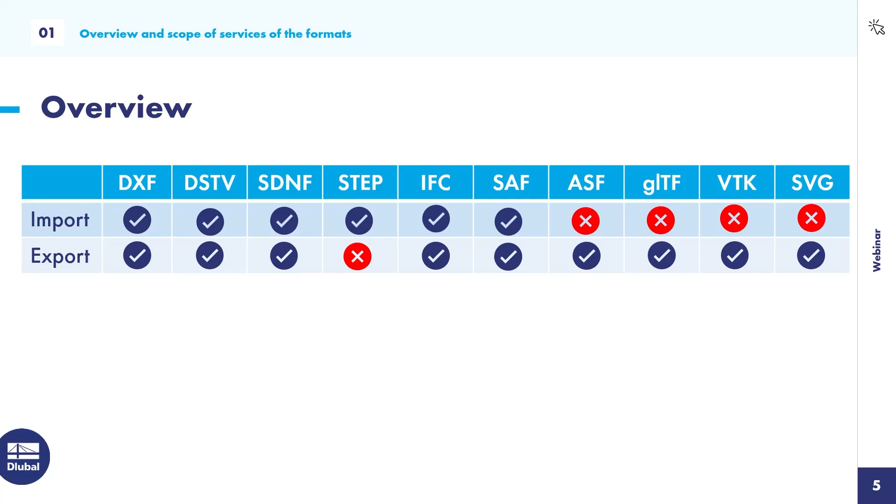We will start with the DXF interface and some brief overview about the import and export possibilities. Concerning the import, we mainly support the import of nodes and lines. You can, however, also import members from the DXF format. To do so, you have to mention the cross-section and optionally the material name inside the layer. And then we can read this information and automatically create members. We can also import surfaces from AutoCAD, however, only if the object is a 3D face element.

Then concerning the export capabilities, here we mainly export nodes and lines. So members with the graphical rendering in RFEM will be exported as a simple line, not as a 3D rendered object. We can also export dimension lines, and concerning the results, for example, the FE mesh or the deformed structure, as you can see here on this graphic.

One more information regarding the import. There are 2 options. We can import the DXF information directly, so you get the lines and the nodes and so on, or you import a DXF as a background layer. That is, of course, also possible. Now I would like to give you a quick demonstration of the import and export. I'm starting with the import.

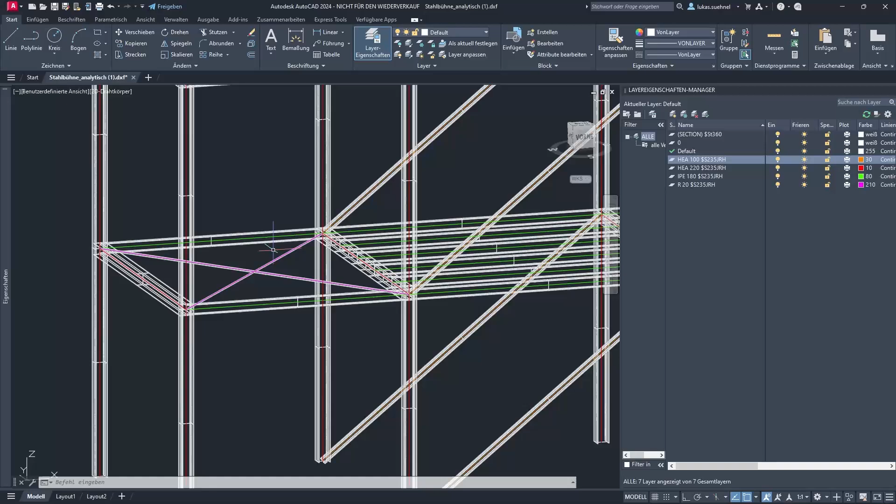And I also assigned the cross-section and material name to these layers, as you can see here on the right-hand side. The HEA 100, then the $ sign that splits the cross-section and the material name, and then the material description or name. So if you have that, you can import this into RFEM 6. I already saved it as a DXF file, so there's nothing to that.

And then I can go into RFEM 6, go to File, Import, and use here DXF2. I can select the DXF file, and then I will get a little dialog that allows me to define additional settings. First of all, I want to rotate the structure because otherwise it would be upside down due to the global coordinate system. I want to generate the members based on the layer names.

And I also want to import only selected layers. So in that dialog, I already see which layers I have inside that DXF file, and I'm not interested in the default or the specific section layer. I only want to import the center lines, basically.

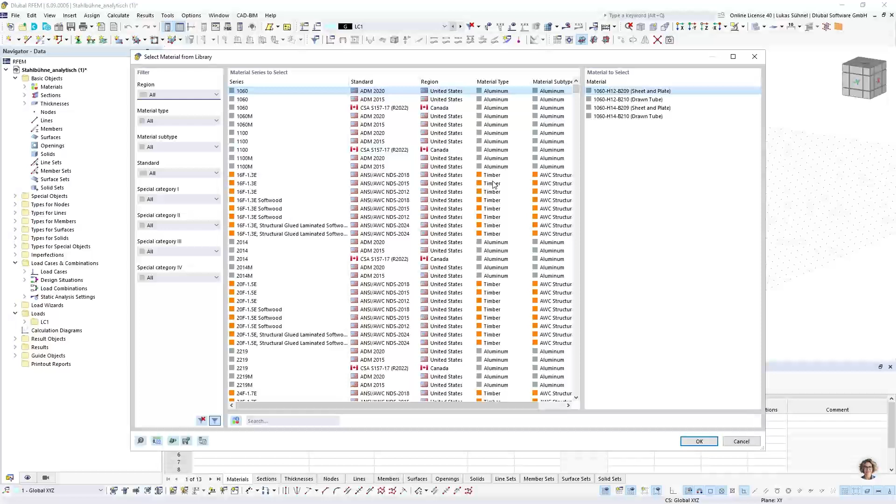So let's do that. We'll take a short moment. The cross-section or the conversion tables will open. So in case your layer names do not match the cross-section or material name inside RFEM, you can define them in this conversion table, assign the related Dlubal material or section, and then you can import it. It should be filled correctly on my side here already, so I don't have to do it.

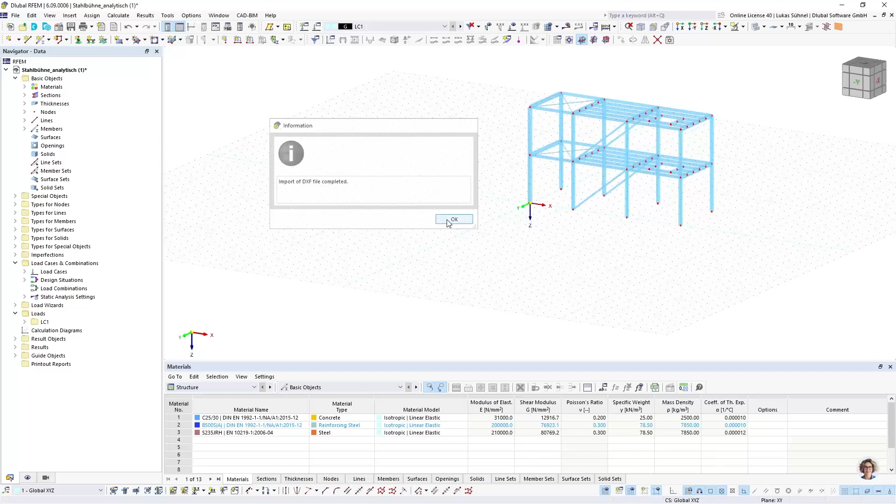I just click OK. And now RFEM will lock itself. You can see it on the bottom. Everything is grayed out. I can't do anything, and this is on purpose. We are using our API to read this data, and while the API is working, you're not allowed to do anything in RFEM. So we are locking the screen. The import is finished, and you can see the same structure here in RFEM now.

We can briefly check the imported data, for example, by using a specific display function. I can use colors of rendered objects by object property, member section, for example. And then I can quickly double check if I have the right sections in my file, so basically if the conversion was set up correctly.

Or you can run additional checks. For example, under Tools, you have a model check for identical nodes. It shows up quite often that in DXF files there are nodes very close to each other, or multiple lines on the same location, and we have these model checks that can help you find these situations. For example, you can set the tolerance for identical nodes to 1 centimeter, and then you can check if in a radius of 1 centimeter there's more than one node, and then you would see those nodes here. It's not the case here, so it should be fine.

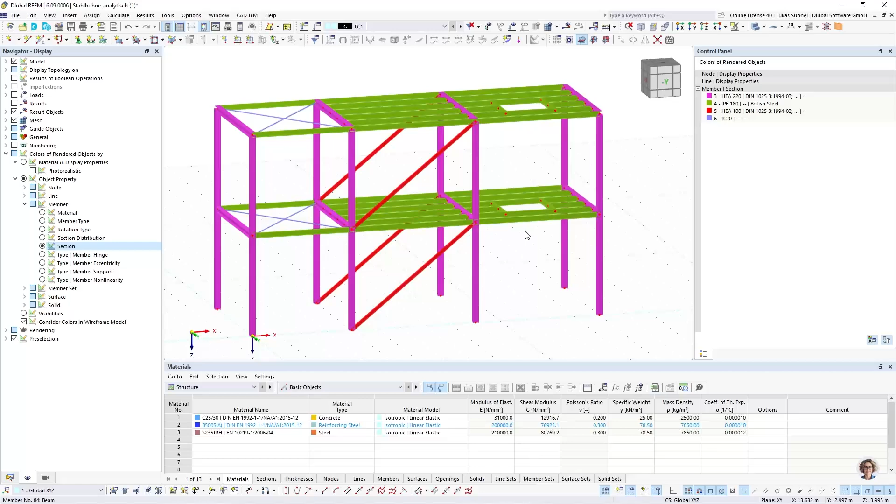And with this data, with these native objects, members, lines, and nodes, you can continue with the loading, the supporting, and adjusting the structural model in general, of course. That is the DXF import. And now I also want to show you the export. So let's open another file. I have them prepared, of course.

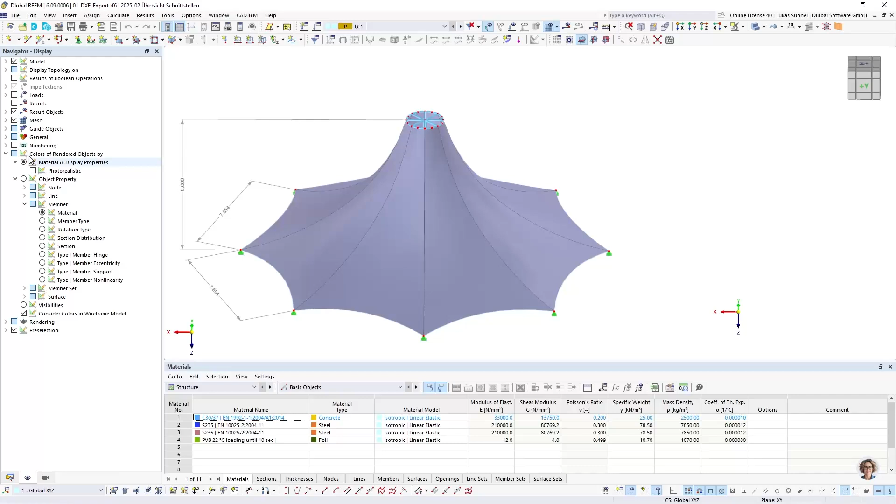That is a membrane structure, a little tent, basically. Let me show that quickly. All right, so here already with the results, but I can turn them off. So maybe just some brief information. In RFEM 6, you're able to run form-finding calculations. Therefore we have this specific add-on, Form-Finding, that allows you to model these membrane structures as we have it here. You can support these membranes on the bottom, for example, via a cable, and on top via this supporting circle of beams.

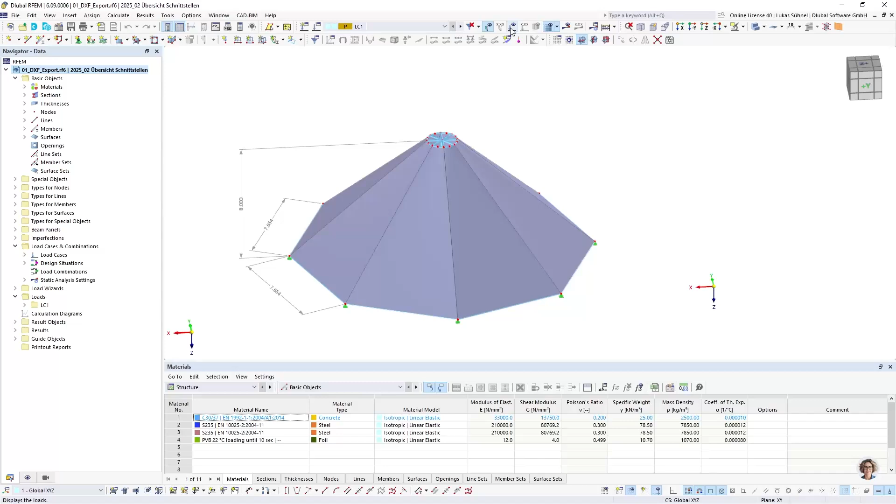And then you need a prestress load case, and inside the prestress load case you can define the target force or the target stress or the target sag of membranes and cables, which has been done here. And then you can run the form finding, and RFEM will calculate the shape that is required to fulfill these predefined loads.

Now that is the result, and it is quite common to export these structures into AutoCAD for additional drawings and so on. So we developed not only the DXF export, we also included here options to export the deformed shape. I'll put it on my desktop.

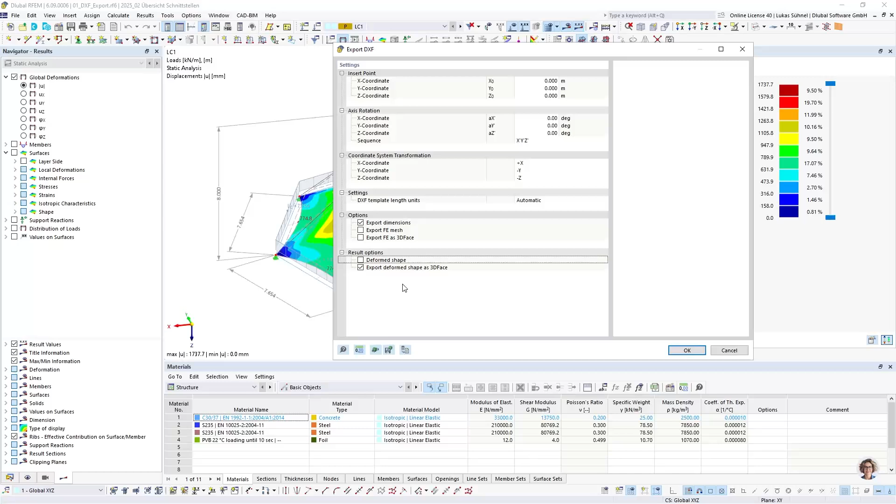And I have here various options for the export. I can export dimensions. I can export the original FE mesh, so the FE mesh that we create before the form-finding analysis, but I'm not interested in that. I can also export the deformed shape, or actually I'm just looking for the deformed shape as a 3D face, which helps me with the rendering. So these are the settings.

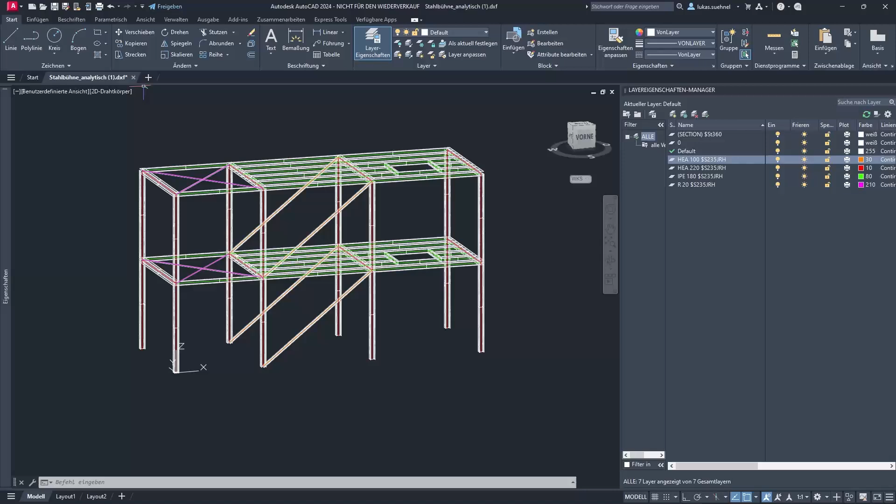I press OK. RFEM should be locked again in a second, because we're again using our API. Yep, happening now. And as soon as it's finished, it will unlock and give us a message: export is done. Now I can go back into AutoCAD, maybe close this file here, and then I can open the deformed shape DXF. Let's zoom in. So that is the result.

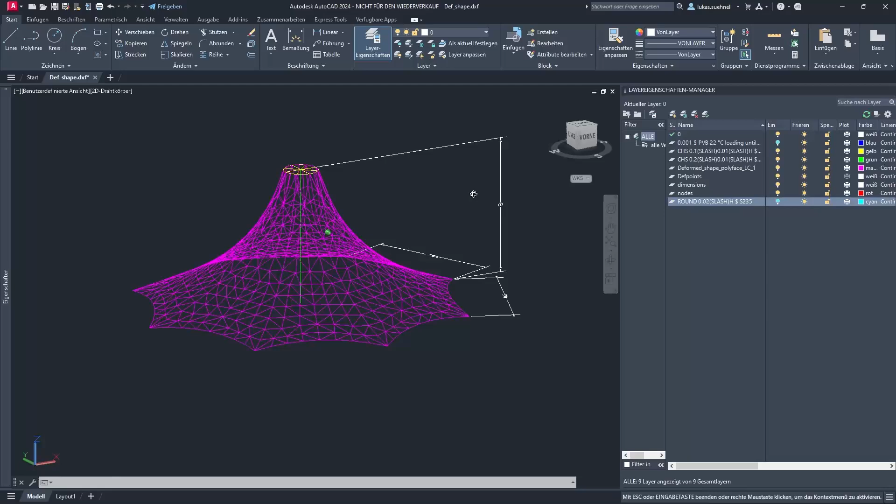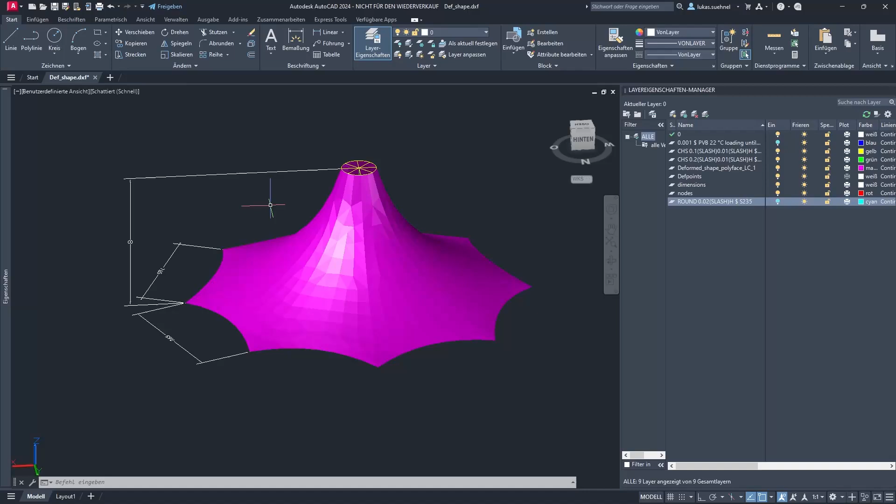Now I can hide a couple of layers which I'm not interested in, these cables on the bottom, for example. And I can display the deformed shape, and I can also use a different rendering setting for a nicer graphic. We can also see the dimension lines. It's not just simple lines, it's a real dimension line where I can change the settings and so on. All right, so much regarding the DXF interface.

Let's already go to the next one, and the next one is the DSTV interface. The DSTV file format was developed and introduced by the German Steel Construction Association. I have a product description from 2000, so it's a rather old file format, but it has many strengths when it comes to exchanging pure beam structures.

It contains relevant information such as cross-sections and materials for the members, but also supports, hinges, eccentricities, member types, sets of members, member elastic foundations, and concerning the loading, the typical nodal loads, member loads, imperfections, and of course load cases and combinations.

Due to these diverse options and the simple definition inside the format, which I will show later, it can be found in many programs. So many of the steel detailing, but also other programs, use or offer an import and export into the DSTV file format. And I listed some of them on the bottom: Tekla, HiCAD, from the, let's say, steel detailing area, then cadwork, HSB CAD, SEMA from the timber construction world, but also additional programs, BuildSoft, Infograph, and many more.

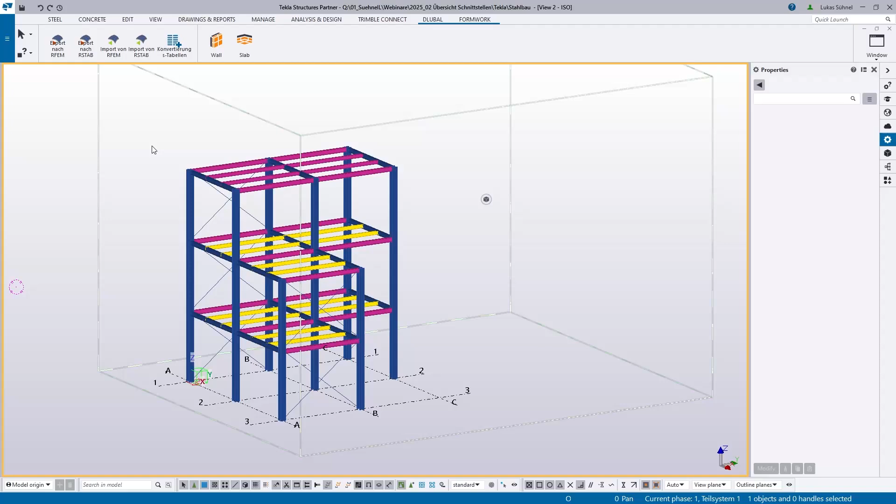Yes, that is true. We have a direct interface. It's working quite well. But a direct interface always requires to have both programs on the same PC. So you need to have Tekla and RFEM on the same PC. That is not always the case. And then a file format for the data exchange would be quite handy. And we have that for Tekla. And I want to show how you can do it.

So first of all, you select those objects that you want to export. Then you can open this menu, go to export. And now, not so well known, I would say, is the FEM export. And here you find the DSTV file format. You can select the output file location under the parameters tab. So I put it on my desktop.

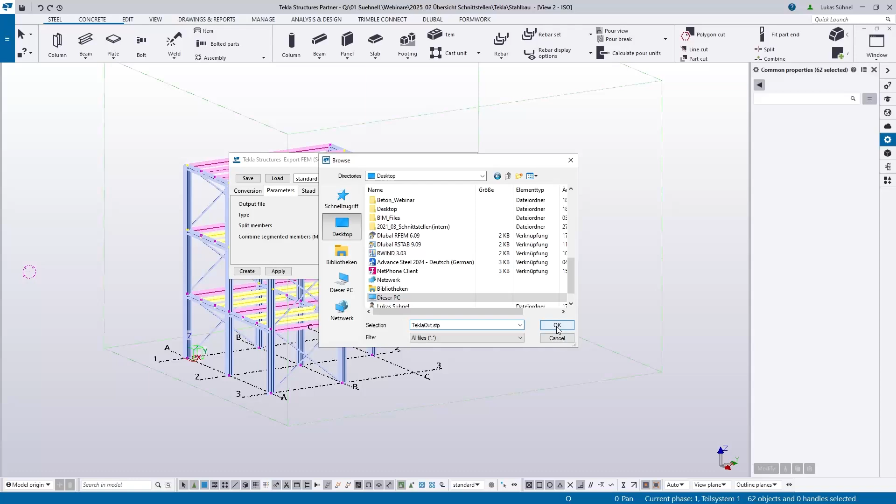Tekla out. And little hint, add the .stp description here, then it's easier to find it in RFEM 6 when we are importing it. Press OK. And then I guess you have to click on apply and create. And the export should be done. Let's have a brief look. I will open the file.

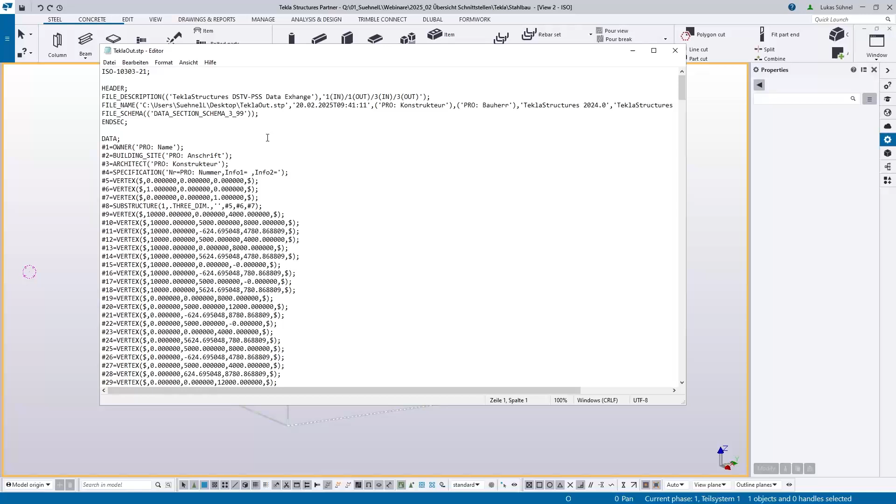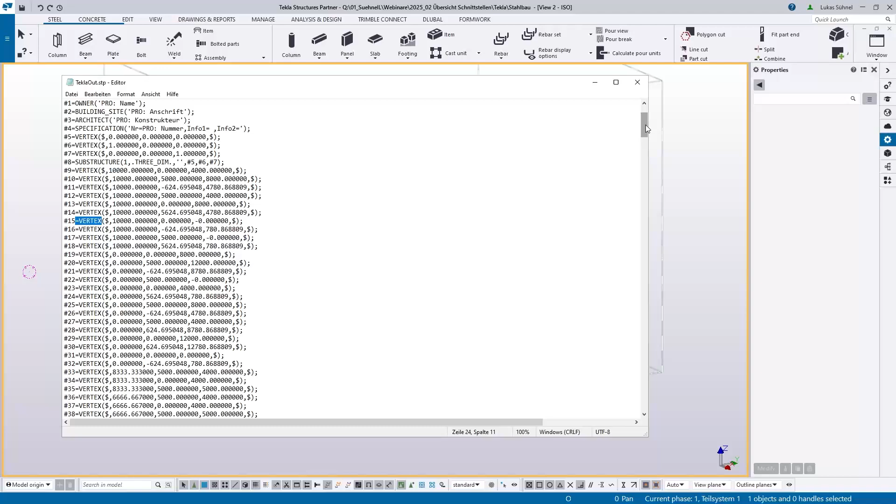This is how the file format looks like. So you can simply open that STP file with the editor, and you can see the program it originates from. You can see maybe even the person who created it, the version of the program, and then you get a long list of nodes. So vertex is basically the node. Coordinates, then we have the material, we have the cross sections.

Here the focus is usually on the name. Because we are converting the names anyway, it's not about importing the cross-section values or something like that, which can also be documented in here theoretically. Tekla doesn't do it. And then after materials and cross-sections, we have these elements, and these are basically the beams. So the beam or the member type, start and end node, the cross-section at member start, cross-section at member end. So it's possible to exchange also tapered members.

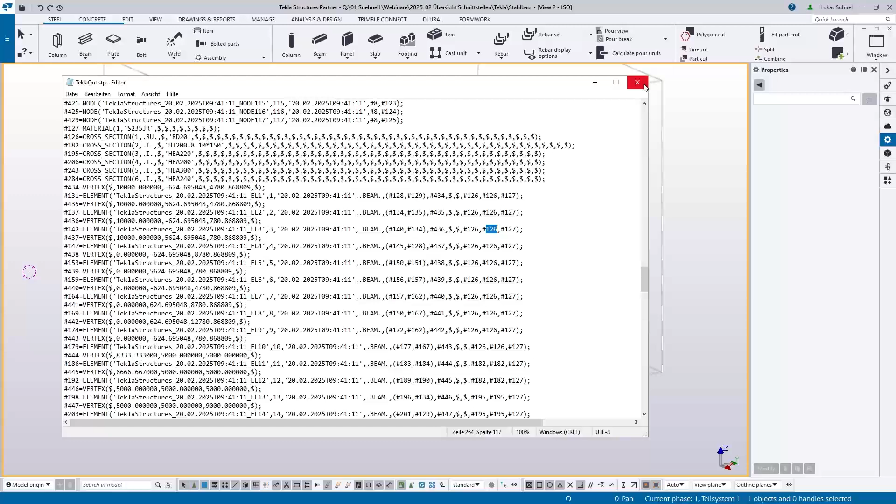And further down, there can be more information about loading and hinges and so on, which is not the case here. All right, so let's import that file into RFEM 6. I'm closing this membrane structure. File, import, DSTV. Desktop, just navigating into my folder, Tekla out. Okay.

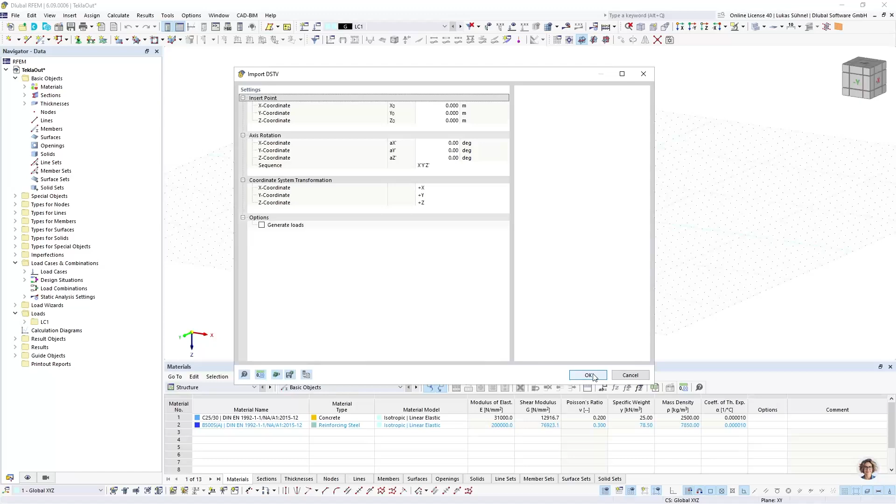RFEM will be locked again after I press OK in that screen. So I could import the loads, but there are no loads inside, so I leave this toggle unchecked. Then again, conversion tables to match the section names. I did that already here. I can press OK, and the import will start. All right, so import finished.

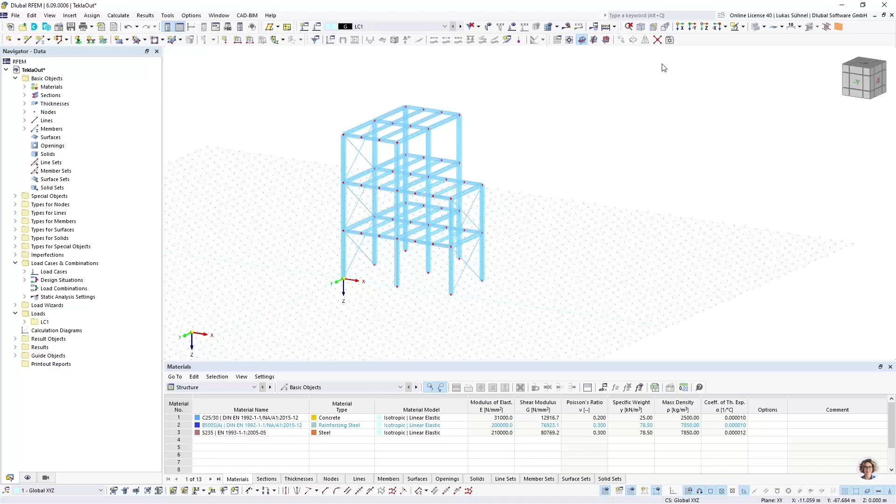We have a couple of free nodes which have no use in that moment. I can get rid of them by going to the edit menu, select, and then we have an option free nodes. And then all of these free nodes will be selected, and I just hit the delete button on the keyboard and they are gone. And now you can see we have the same structure as we had in Tekla.

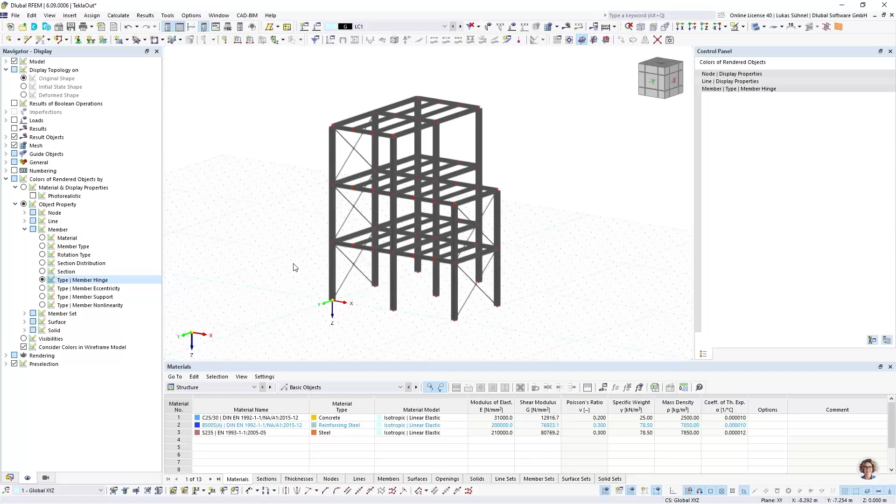Again, I could double check the content by using some rendering functions for the cross sections or member types. Here I can see it's just member type beam. And if I would select the member hinges, there are no hinges assigned. So I got a model from Tekla where every beam is connected rigidly to the next beam. That is not ideal. In RFEM, I would continue now with adaptations concerning this analytical model.

And some of these adaptations could be the following. Let me show rendering via material again. I could select, for example, all these bracing members and assign them the tension member type. And this can be done rather quickly. I have these synchronized selection options in RFEM. So if I click in the data navigator onto a specific cross-section, all these members with that cross-section will be highlighted. So there's no need for me to manually do that or draw little windows.

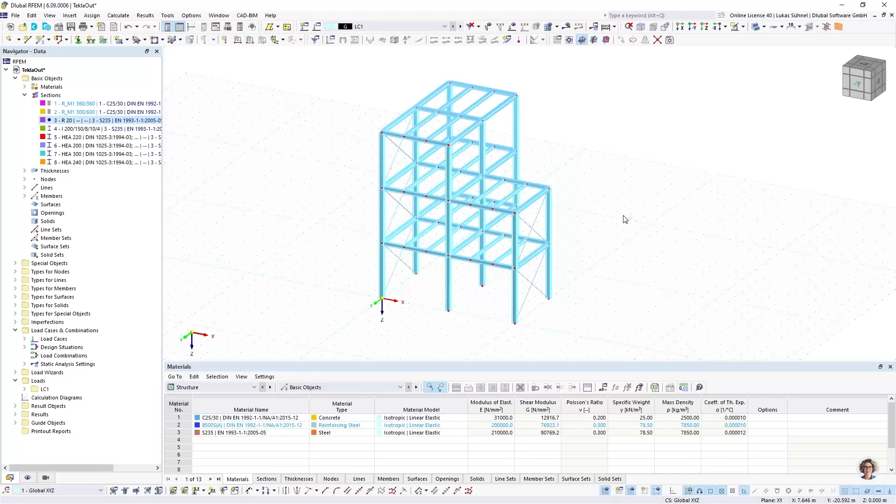Just select the cross-section and then, for example, double click on these members and change the member type to tension member. The same could be done for some of these smaller beams or horizontal beams. I'm selecting these cross-sections here, double click and define here member type truss, which means it is a member with hinges for the bending moments at the end.

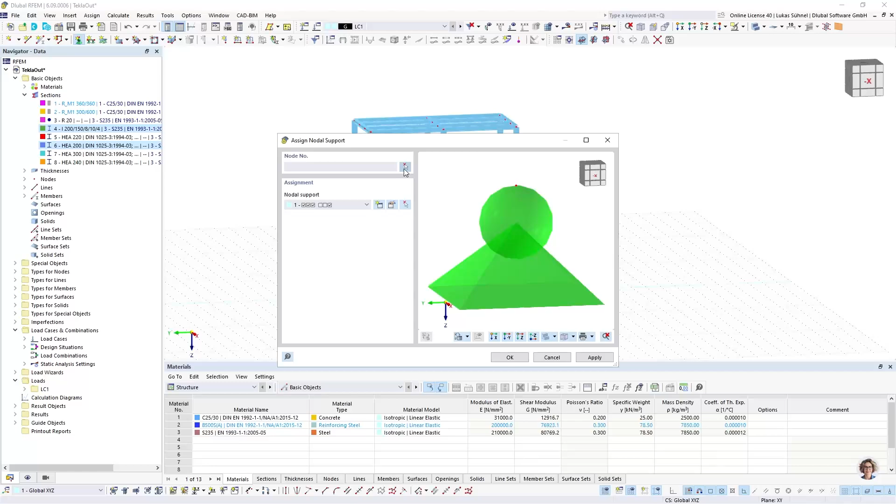I could assign supports and so on. All the things that are required. And then I can assign loads and so on. And of course, I can also export this file again into the DSTV format. File, export. I put it again on the desktop. RFEM out. Okay. Again, takes a little moment. All right. RFEM out. I can open it with the editor.

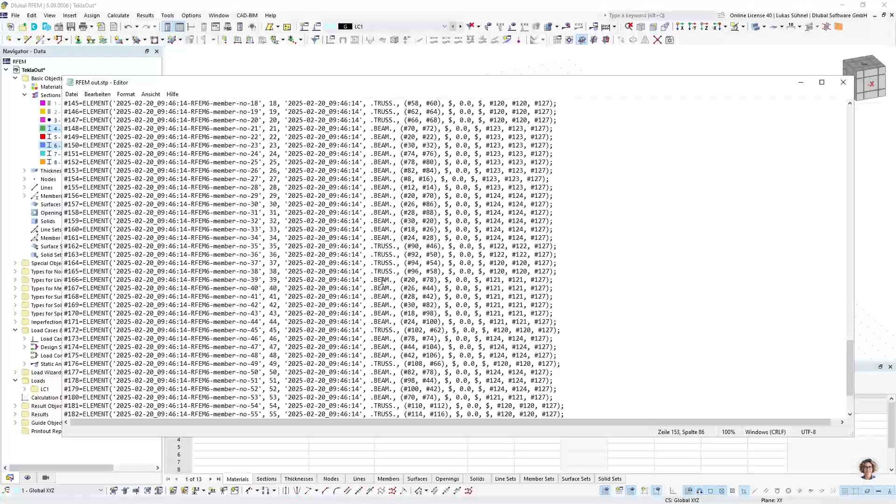And we have, of course, in general, the same information inside here. We sort them a little bit differently. We have here chapters, coordinate system, nodes, then cross-sections, materials, again, the members. And you can see here now we have tension members, we have truss members, beam members. So there is definitely modification visible. Okay. And this file then can, of course, be imported into any of these other mentioned programs.

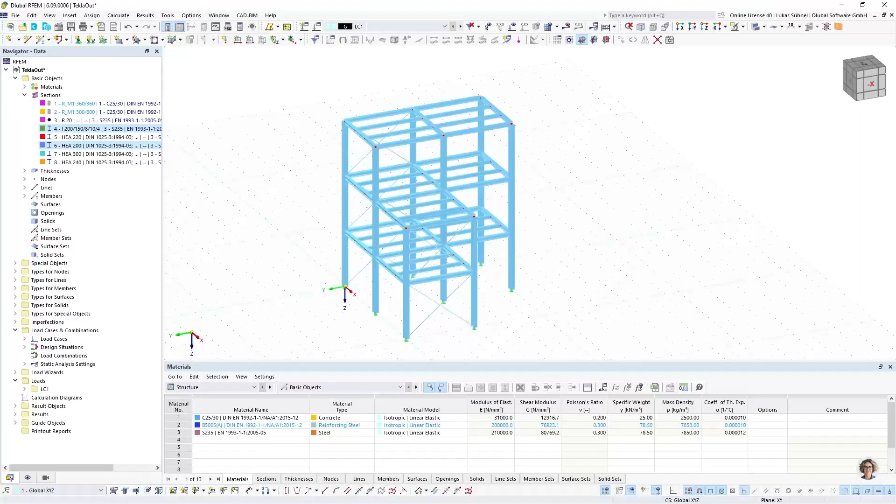It can be used for the transfer of beam structures, so materials, cross-sections, uniform members, no tapered members, and eccentricities, but it also supports surfaces, including openings, at least on our side. The format has more capabilities, for example, connection details, curved elements, loads, which are currently not supported in our export or import. Yes, let me also give you a brief demonstration of that format. I will close this file and open another one, which is this one.

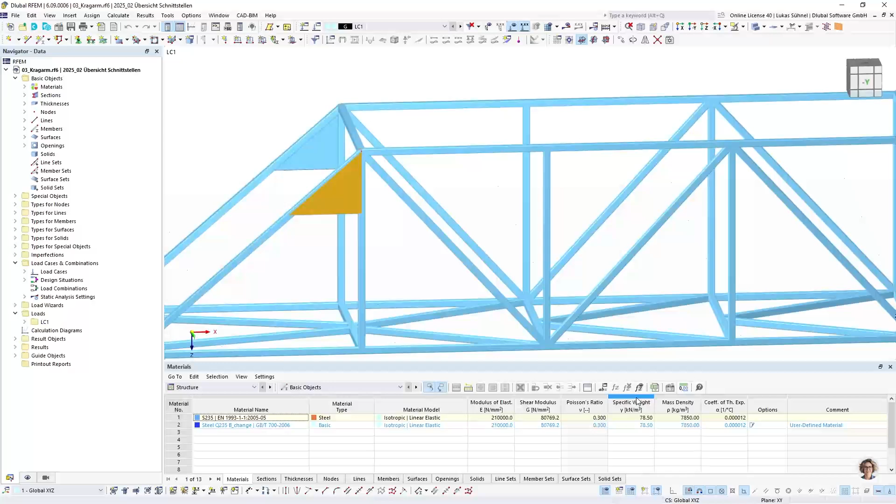It's like a cantilever truss structure, if you want to call it that way. So mainly beams, but also some surfaces here, 8 mm thickness, to get a more rigid steel joint in that area. And then here on the end, also a surface with an opening. That is maybe the structure that we want to give to the steel detailing person to save a little bit of time with the modeling. And we can do that. My plan is to import it into Advance Steel, and for Advance Steel, the ideal format from our side is the SDNF format.

So I go to File, Export, SDNF. Under the desktop, I will save here this, how we want to call it. I want to export linear members, surfaces, and openings. Yes, I press OK. And while the export is running, I will look for Advance Steel on my PC. Yep. All right. So let me call up Advance Steel. I can use this menu for importing files. Here I, however, won't find the SDNF format.

You can find it under the Export and Import menu or tab. And then here you have additional formats, IFC, CIS/2, SDNF, which we are going to use, but also the DSTV format and others. So I will select reading of the SDNF file. And then I can see here the one that I just exported. I press OK here.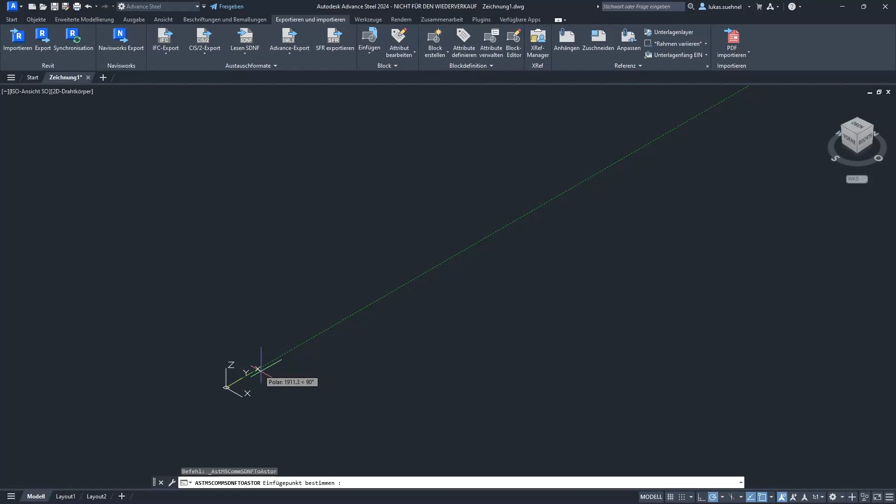Let's see. Sometimes we have to do a cross-section conversion similar to our program. Advance Steel is reading the cross-section names from the SDNF file, and if it doesn't know what Advance Steel cross-section it should be assigned or it should use, then you have to assign it manually. I did that for the German webinar already, so the window didn't pop up here. But we have the cross-sections, which is the most important part.

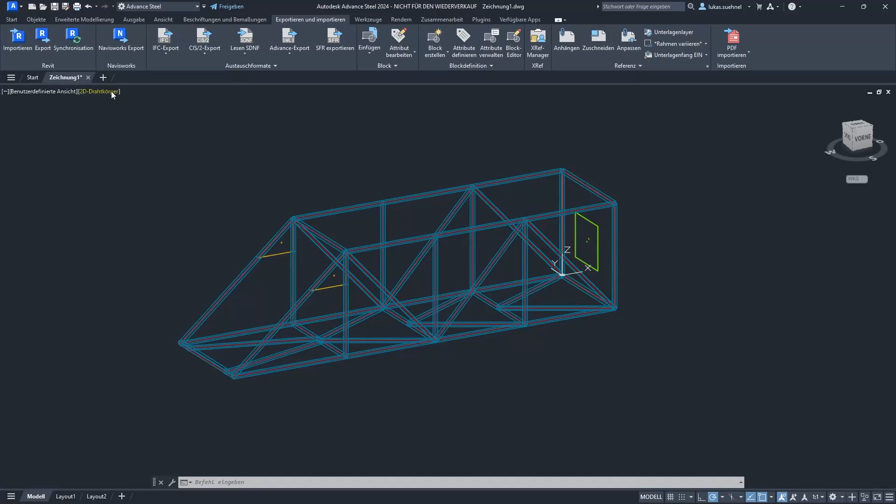And now let me change the rendering a bit. And we can clearly see that the import was successful. I get the same structure. And it's not just graphical objects. We can also see the information here. So thickness 8 mm. I can display the cross-section.

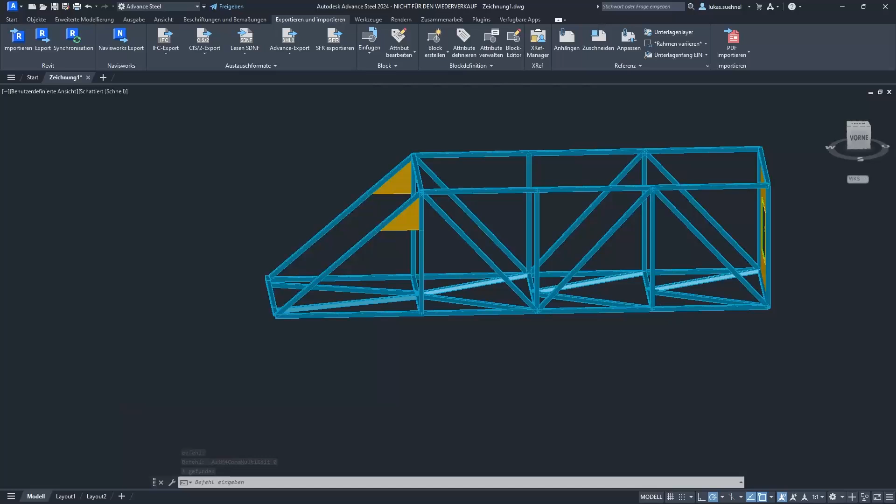Hollow cross-section 40/3. So we got the information that we need, and now we can continue in Advance Steel and assign, for example, the connections.

This could be done via advanced modeling, and then I have here a connection manager, which shows up on the wrong side. For example, I want to have a connection in that area, so I select fin plate with 3 connected diagonals.

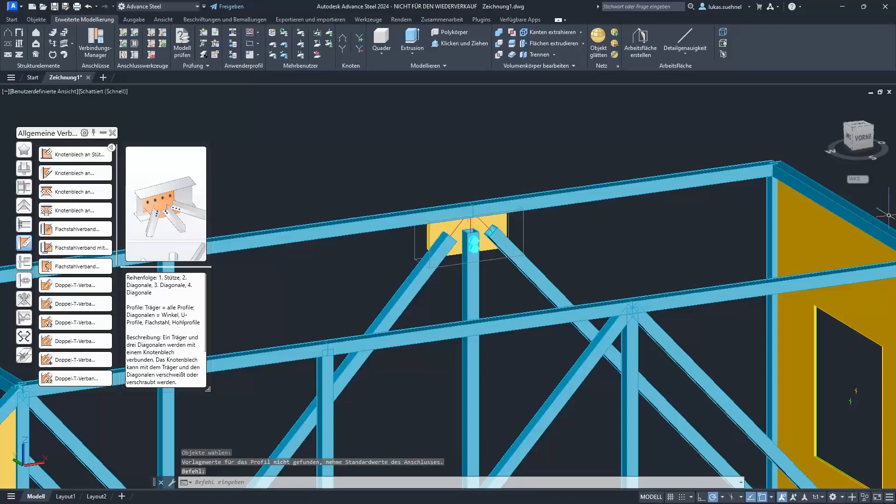So I select the main beam, then the first diagonal, second diagonal, third diagonal. Then I will get a preview of my connection. I can rotate it a bit and modify it further in the other dialog that shows up.

For example, I could modify the fin plate, the amount of screws, the diameter - maybe diameter 12, just 1 screw or bolt. And when I'm done, I can close it and I have my connection here.

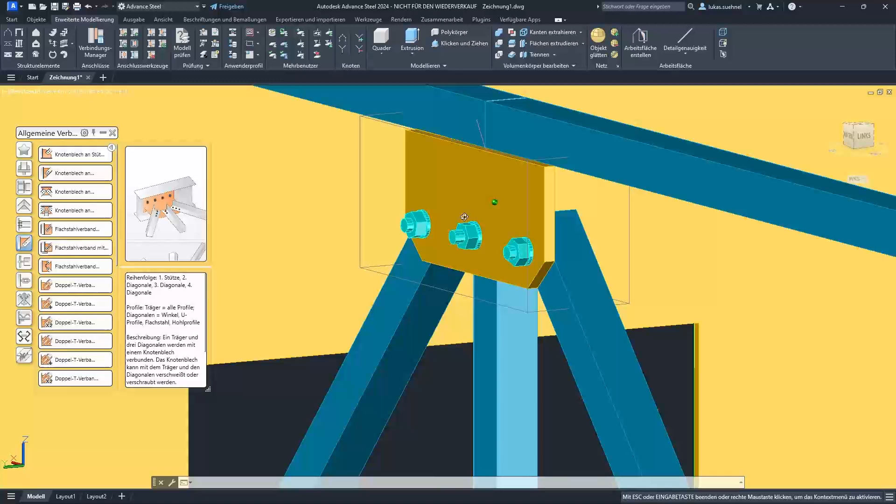So it's clearly visible, even though we exported based on the center lines of the beams, which we can see here, that is not an issue in Advance Steel. It doesn't matter - it will cut or shorten the members according to, for example, the steel joint that we define here. So it's definitely usable.

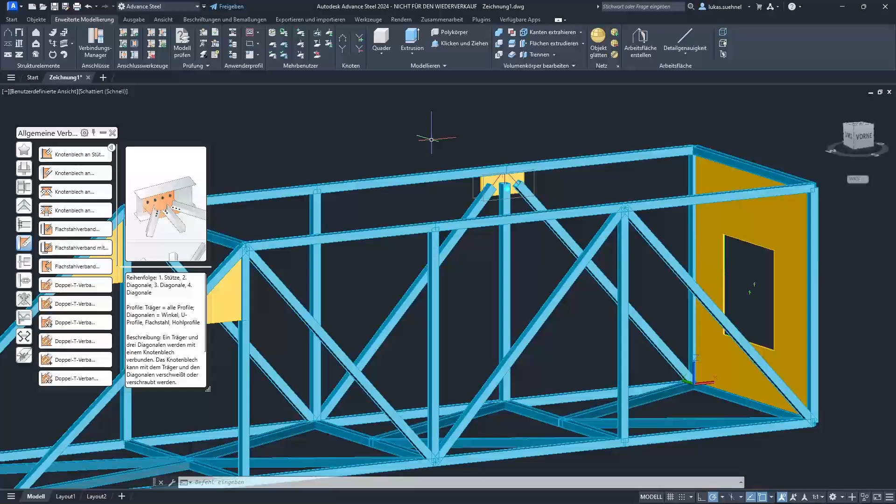Okay, so far regarding the SDNF format. Let's have a look at the next one - the STEP file format. We support only the import of that format, not the export currently. And concerning the import, we are reading nodes, lines, surfaces, and solids.

It is a format mainly for the purpose of exchanging solid structures, 3D objects. Cross-section materials and members is not exactly the purpose of that format.

You also see that when you check which programs offer STEP imports and exports, usually it's common or general CAD programs, or CAD programs with a mechanical engineering background - SolidWorks, Inventor, CATIA, Siemens NX, Rhino. Again, it is for the exchange of solid models.

Usually when you model something in, for example, Inventor, even though it's maybe a 3D hull where you think of beams, cross-sections, IPEs, and so on, when you export it into the STEP format, you get solids for every member. And therefore, I think the use case is not so much for beam structures or typical buildings.

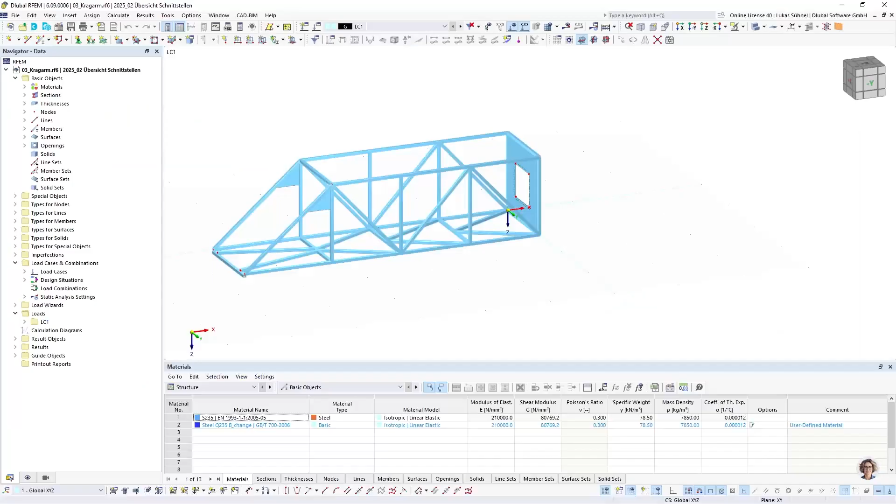And I want to show it, of course. So I go back into RFEM 6, and I'm going to import the structure that we just saw on the PowerPoint. So I will open here the STEP import and go into my folders and run it.

Maybe while it's running, one more information that I should mention, because it is a common question. There are two formats with the same ending. The STEP format, which is for the exchange of solid models, STP, sometimes even STEP. And we have the DSTV interface also with .stp.

This, however, as I said, is mainly for beam structures. So they couldn't be more different - beam structures versus solid models. Sadly, they use the same file format ending, which is causing confusion, because often we have customers reporting that the STEP import isn't working, but then they got a DSTV file or the other way around.

So make sure to check which file format really has been exported from another software, and then use the proper import in RFEM. The good thing is you can also open these STEP file formats - it's the same logic, you can use the editor to open them, and then you somehow see if it's a DSTV file or a STEP format.

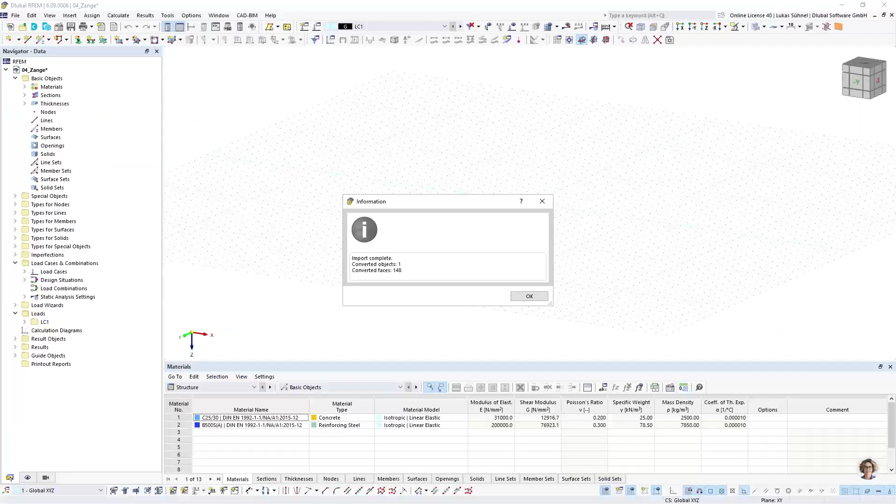All right, concerning RFEM 6, the import is done. We can see the structure here. Let's change the rendering - I should have rotated it before, but it doesn't matter. We got the solids from the STEP file into RFEM 6.

We can see it also here. There are no members, but we have a list of solids currently displayed in red color, which usually means something is not correct.

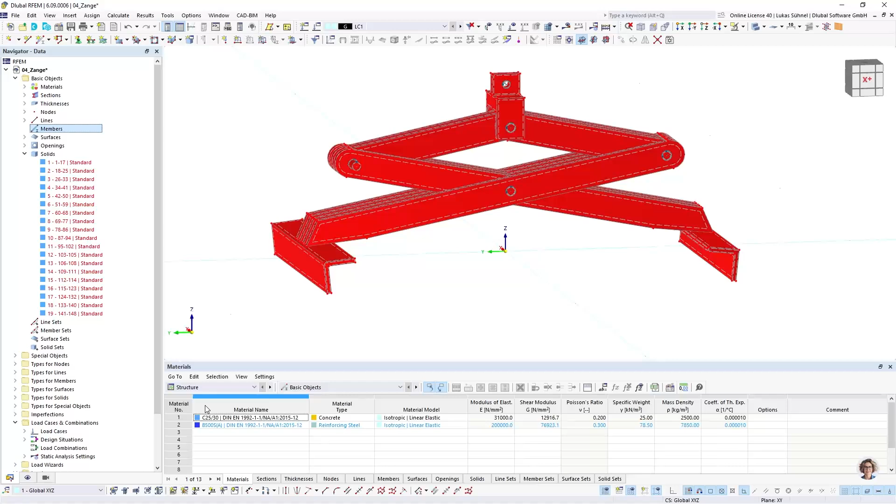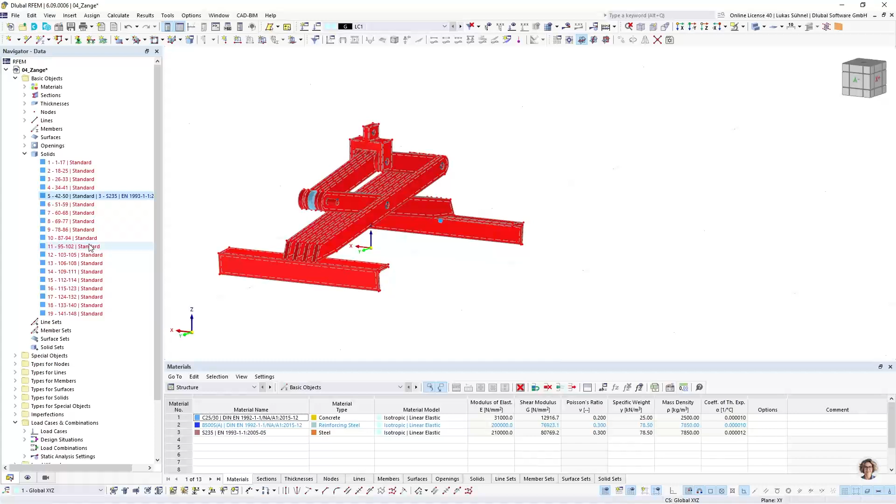We can check it. We can just select one of the solids, double click, and we can see directly the material is missing. As I mentioned, materials won't be imported on our end, but it's of course easy to assign a material - let me use an S235. And with that information, the solid is valid. I can do it for another one - just a second, this one, for example.

Edit, and then I assign the material. I can, of course, use multi-selection and do it for all of them. For today, 2 solids should be enough, because I want to show how you can use the step file.

Now let's display these 2 solids, selecting them again in the navigator, then just these objects and related objects. I can hide the other information in the background, and we can see we have the solid from the step file here, and in theory it is a valid solid.

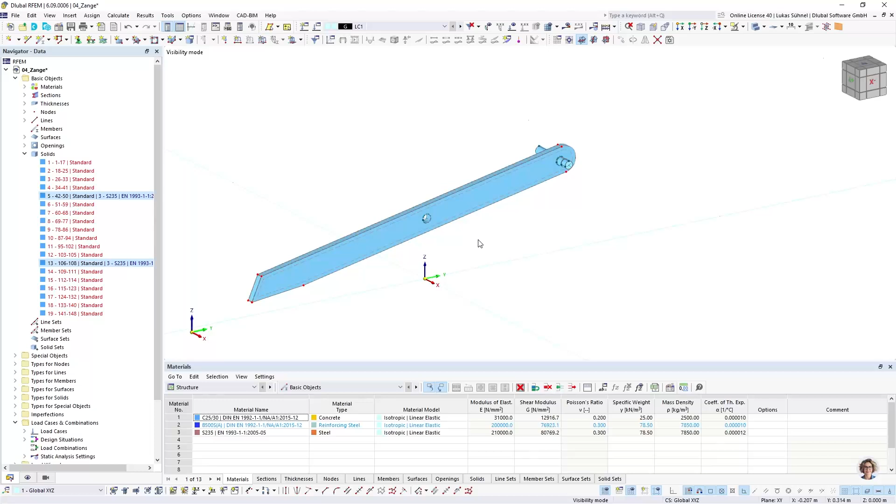The question is, however, if you first of all want to design this structure as a solid structure, or if you want to simplify it into maybe surfaces or beams. And if you would decide to use solids, you still have to manipulate the structure. For example, in that area, we have the bolt here, and we have the solid.

But there is no information about how the forces should be transferred from the bolt to the metal plate, basically. Here we would use surface releases or contact solids. So usually, like in 99% of the cases, you have to do manual adjustments after a step import.

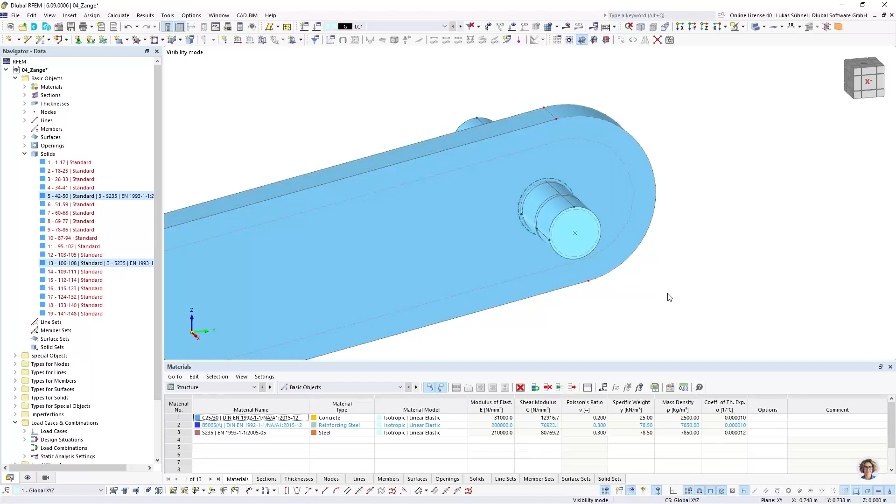Okay, in my case, I would not use solids. I think a surface and a beam structure would be fully okay, or would be enough. I want to simplify it. And how can I simplify such a structure here? Here I have a plane, let's say a plane solid.

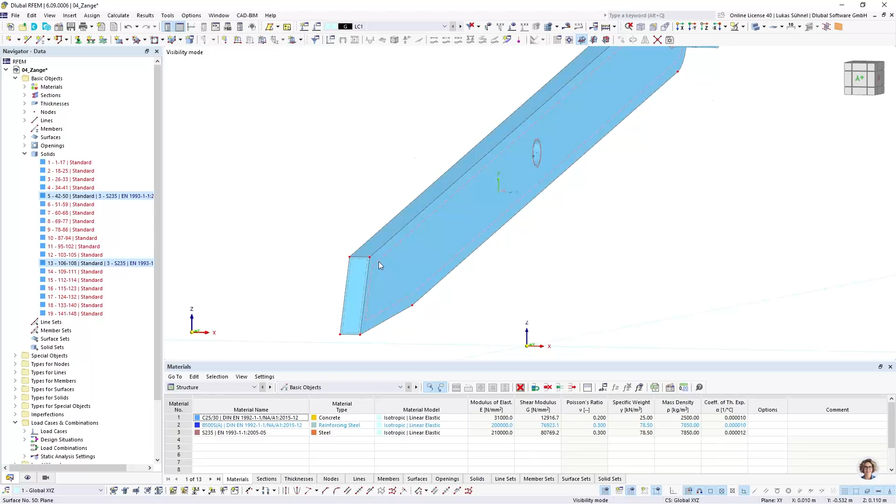I can easily select one of the faces, go to Edit, select Related Objects. Then it will also select the openings and everything that is related to that surface. And I can use the drag and drop functionality. I just keep my mouse pressed, hold the control button pressed on the keyboard, and then I can create copies of that object that I selected.

And I will place it in the center, for which I have a snap point. Then I have this additional surface. That's all I need for that object. So I can select the solid here in the navigator and say delete with boundary surfaces. And then only the surface is remaining.

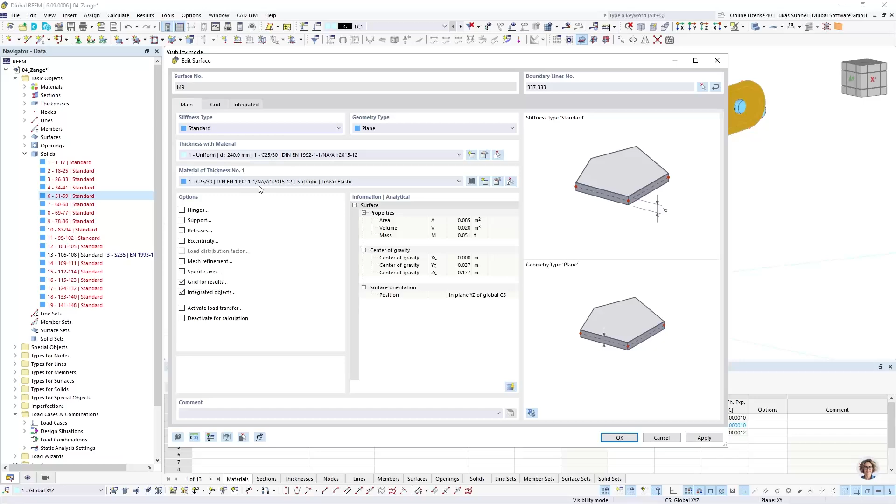I can assign thickness and a material. For now, I don't care how thick it is and so on, but I could define it in here. And then it's, of course, a valid surface.

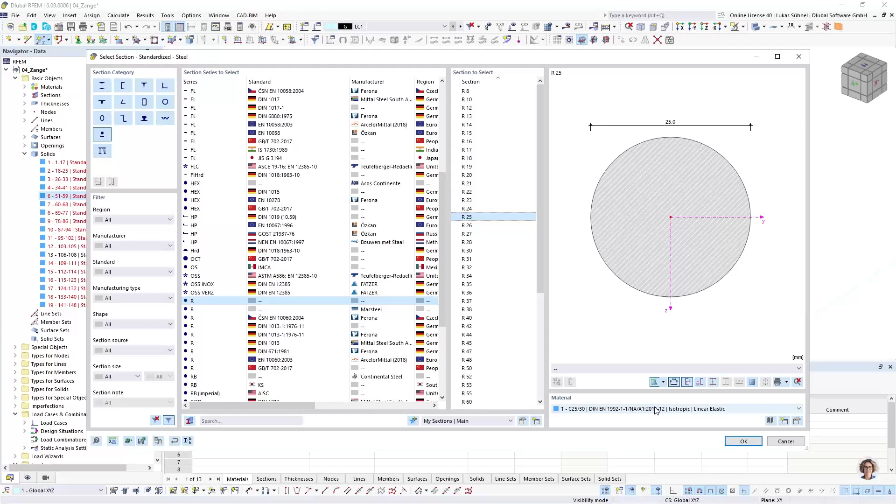Same for this bolt. I don't want to use a solid here, I want to use a beam. So I go into my library, select an R25, which is the diameter of that bolt, R25, with the related material. And I am catching here the snap point, the center of a circle.

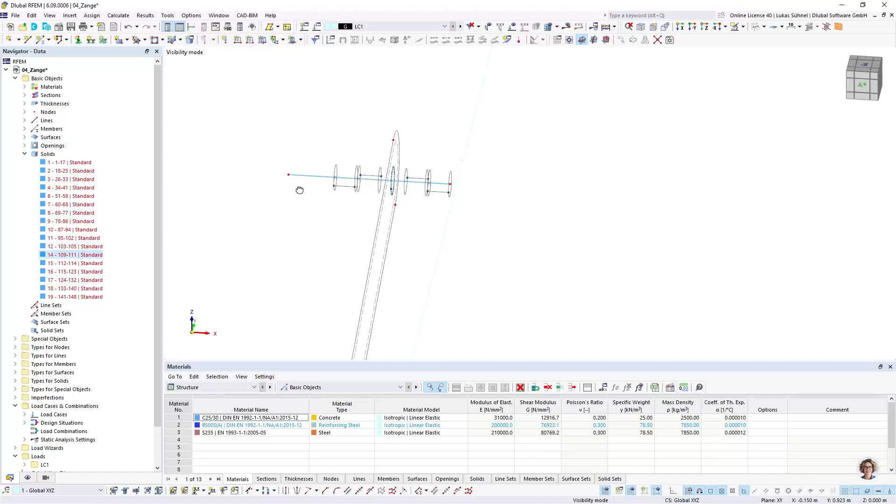That's the snap point I can select, same on the other side. Then I have here a member, and I can delete this solid with its boundary lines. And then we can change the rendering. There are some lines remaining. I can simply delete them.

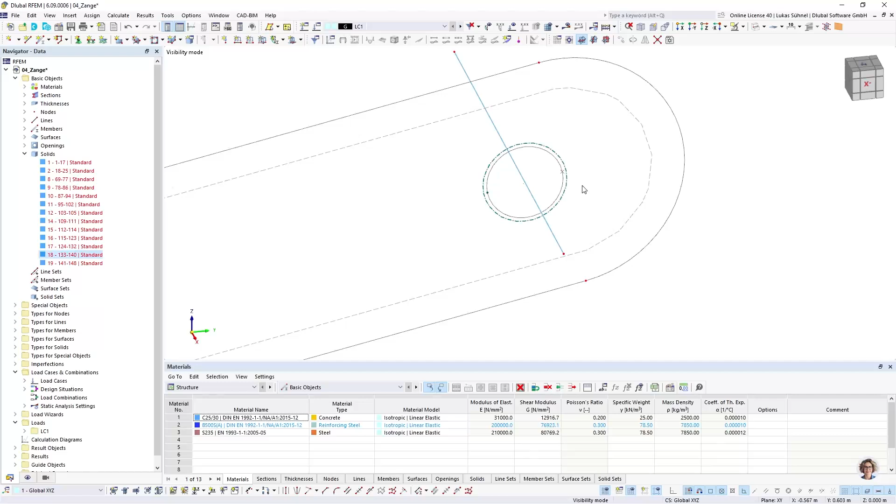And I have my simplified surface and beam structure. Concerning the connection between this bolt and this metal sheet, I would use maybe like a web of members of beams or coupling members to create a proper force transfer. This would be my simplified approach for that model.

Let's display everything again, and you can easily copy this surface to the other two sides. Do the same steps for the rest of the structure, and I think it is a valid use case, the step import.

All right, yes, so far regarding this interface. Let's switch to the next one, which is the IFC format. It's the format for the construction world, civil engineering world.

We support the import and the export, of course. Concerning the import, we are able to import the IFC files from versions IFC 2x3 or IFC 4. We can import the structural analysis view and the reference view, which is not so well known. Usually people or customers only know that there is the IFC format, but it's not so well known that it has different views, or let's call them subformats.

What is quite common is the reference view. This is what you usually connect with the IFC format, architectural representation of objects. So every object is a 3D solid, basically. We can import that, of course.

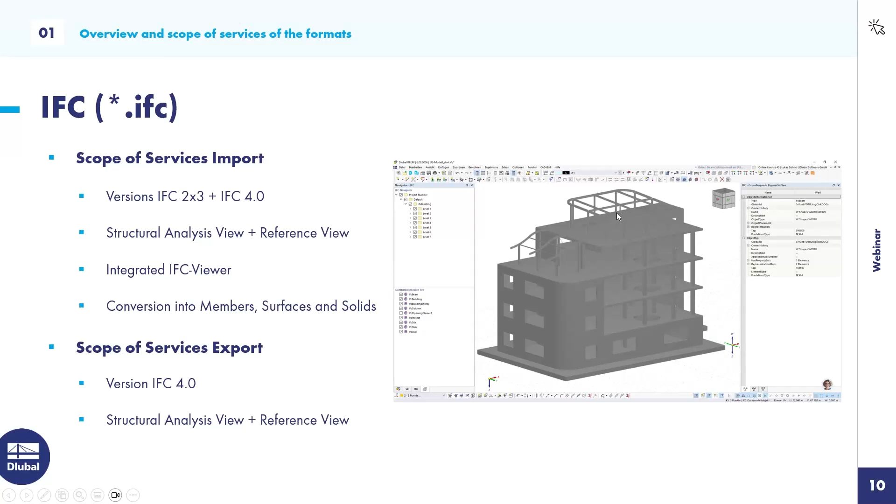I won't show it live now, first of all due to time, but also because I already gave a webinar about this topic. So more details about this can be found in that webinar.

So the next interface is the SAF interface, the structural analysis format developed by Nemetschek in cooperation with other structural programs. It is a file format for the exchange of the analytical model. We support the import and export, here version 1.0.5, which is not the latest one. We are aware of that, and I'm quite sure we will run an update of the interface to the current version 2.2.

Nonetheless, you can use it to import and export model data such as members, surfaces, supports, hinges, eccentricities, but also load cases and loads, node loads, member loads, and surface loads. It is similar to the IFC structural analysis view. So the main purpose of that format, as I said, is the exchange of the analytical model. It could be a use case between the structural engineer and a checking engineer, which is quite common here in Germany, like a second instance checking the structural calculations.

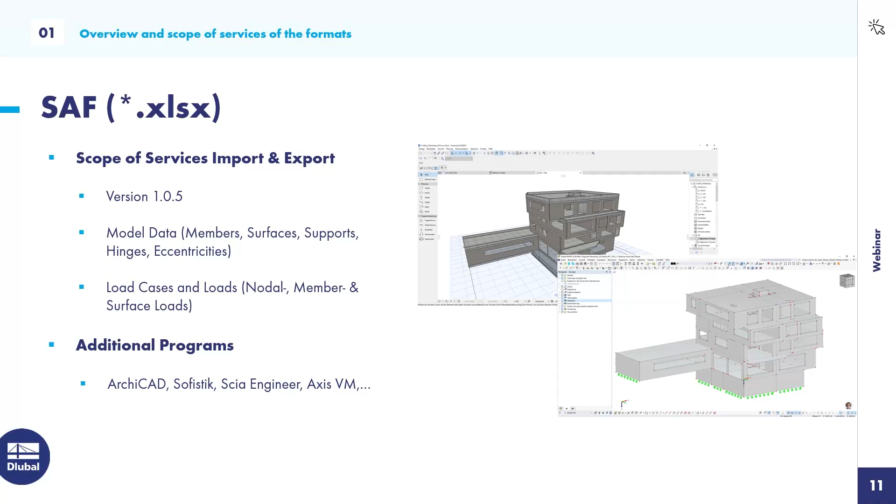Okay, the next format is the ASF format. We kind of remain in the Nemetschek and Allplan world. It is a format especially for the data exchange of reinforcements, mainly for Allplan, but I think other concrete detailing programs also support the ASF import. So what is the scope of services here? We can export our surfaces and the required, provided, or not-covered surface reinforcements into the ASF file, and then you can read that file in, for example, Allplan.

There you get dynamic graphics. So you can see here the required reinforcements on the top or bottom side of the surface, and the colors represent different required AS values. Now you can define the reinforcements, for example a mesh reinforcement, inside that surface, and these graphics will then show the remaining or not-covered reinforcements. So you can graphically see where something is missing, where you have to add additional rebars. That is the use case.

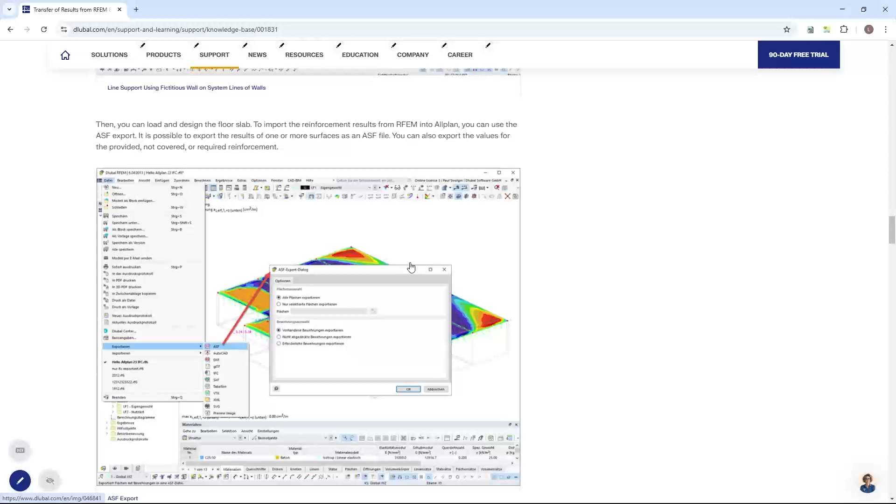This use case has also been described in a knowledge base article by my colleague Paul Sivolgin, called 'Transfer of results from RFEM 6 to Allplan using ASF files.' Quite a nice article, feel free to read it. It contains the most important information, the dialogues, and how you can import it into Allplan. So I won't show it live, I think there's a good article on the website.

All right, now let's come to the last three file formats that we have: the GLTF, the VTK, and the SVG. All three file formats are, how should I say, a byproduct of our own development. We are using them mostly internally for other use cases.

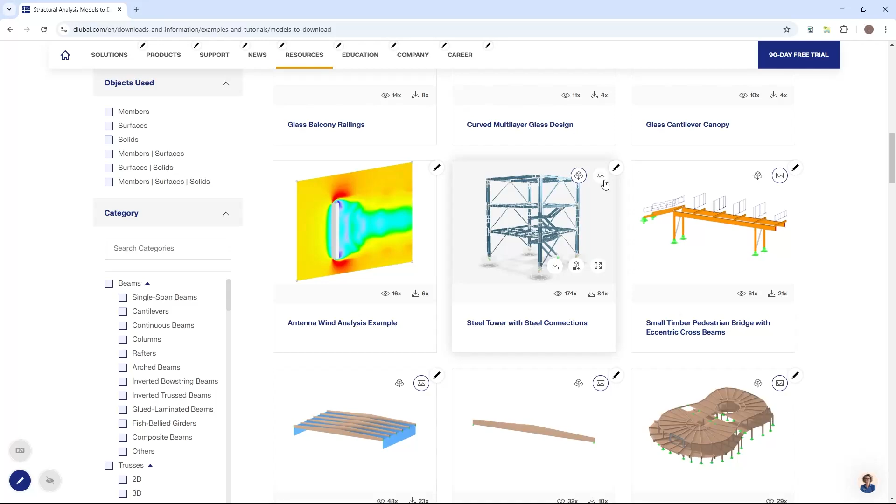And in the background, as I said, we're using this GLTF format. We are also using it if you want to display the file in Windows Explorer. So yeah, that is how we use it.

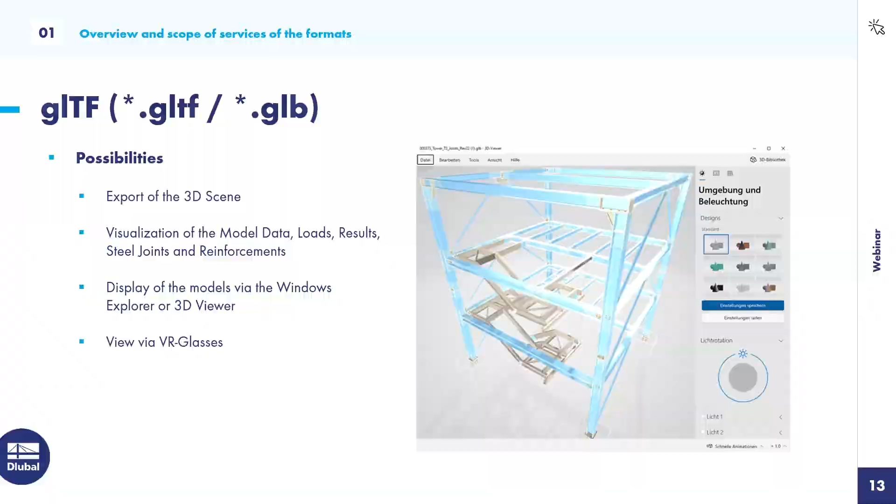And we offer now this export also in RFEM 6, and I want to show it here. So let me close this file and open this file with the steel joints. It's quite a nice file because every connection has been designed with our steel joint add-on. Maybe while it's opening - we have a new steel joint add-on here in RFEM 6 that we developed for it.

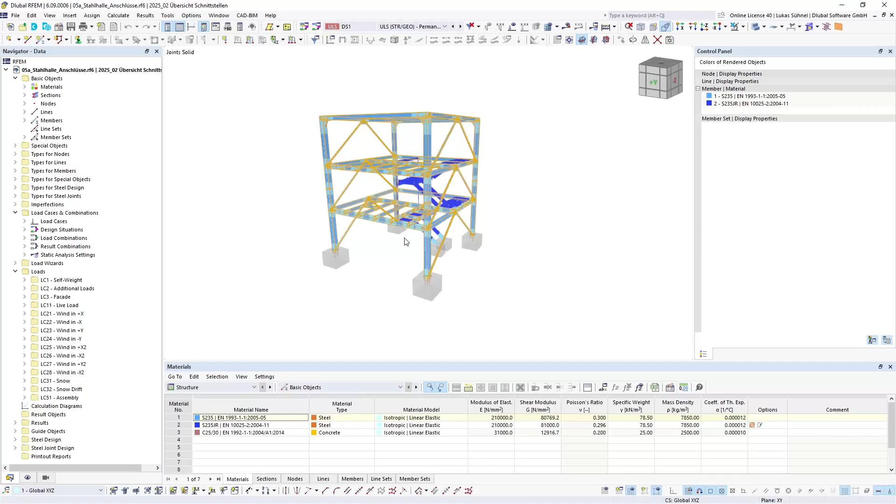The benefits are that it's possible to design 3D joints, so there is basically unlimited regarding the amount of members connected to a joint. The members can come from any direction, and it's also not limited to specific internal forces - any force can be considered in the internal beams. This is the new steel joint add-on, and you can see here every joint has been designed somehow, and that is quite a nice graphical representation we have here.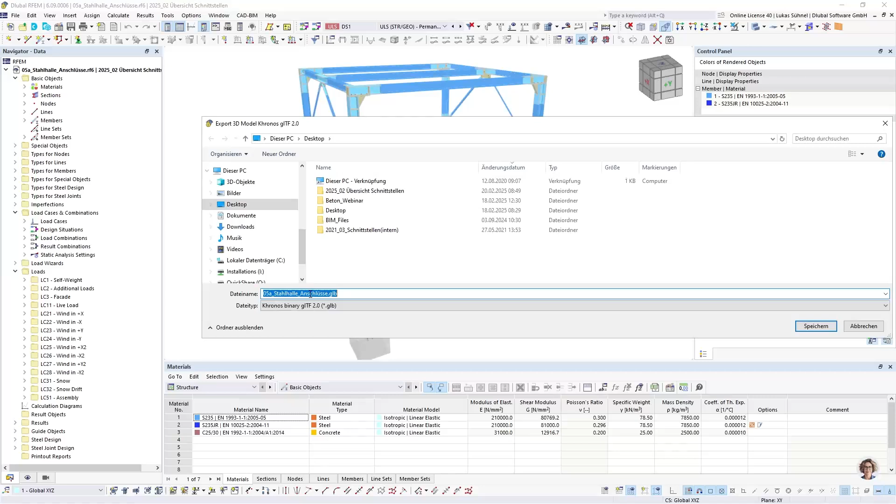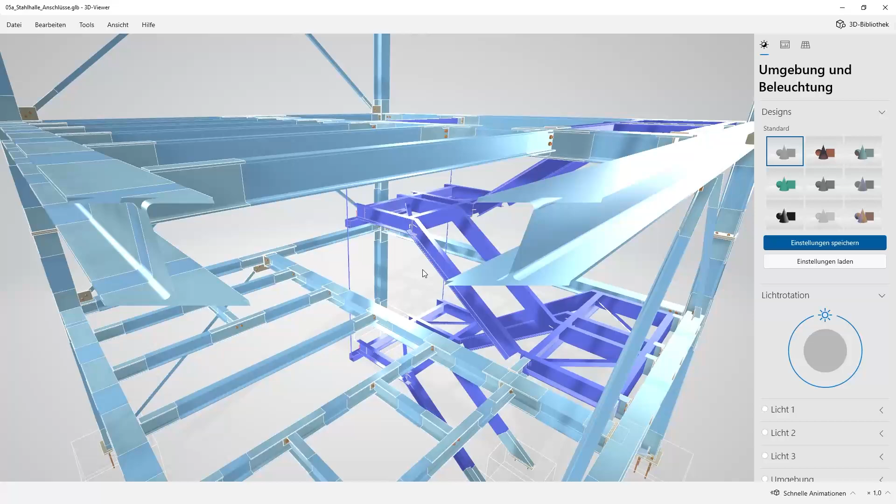The use case of the GLTF format could be that you want to present your work to the owner of the building, and for that maybe you want a nice graphic - this can be created via the file export in GLTF. So I save it on my desktop, press save, and then I can open it. I'm opening it via this 3D viewer, which should be a default program when you have Windows on your PC, and then you can see already that you can rotate through the structure and zoom in.

It's quite nice to navigate through the structure. What you do not get is additional information - it's not, as far as I know, possible to click on objects and read the properties. It's really only for the graphical representation, for viewing a structure.

So far regarding this file format - we also have an export into the VTK file format. The VTK file format, or this export as we implement it, is kind of a container for simplified model data and results, mostly for the results. And we are using it for the communication between our RWind program and OpenFOAM.

RWind is our, let's say, standalone program, which can also be integrated into RFEM 6 - it's like a virtual wind tunnel, so you can calculate the wind pressure and suction on complicated structures and shapes. This analysis is done via OpenFoam, which is a numerical solver for fluid mechanic analysis. You can see or display these results that we are exporting with the ParaView viewer, and this is what I want to show here.

So let me open again a file - I think this concrete building, for example.

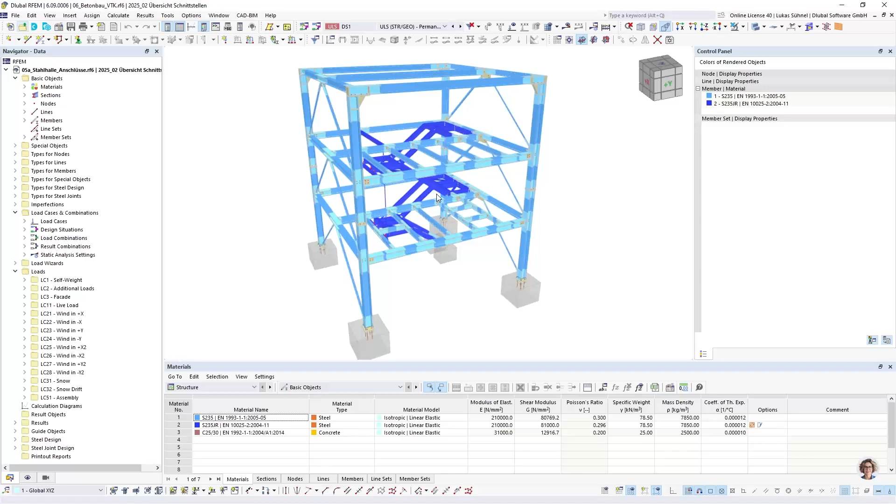And for that, let's say office building, I calculated the results. So I have here the full range of results: deformation, member forces, internal forces. I have, of course, also surface results, stresses, forces, deformations, all these kinds of things. And all these results can be exported into this VTK file format.

So you just click on File, Export, VTK. Let's name it Results, save it on the desktop. It will take a short moment. And then you get on your desktop this results.vtm file, which is linked to, where is it? Yeah, to this results folder with additional files.

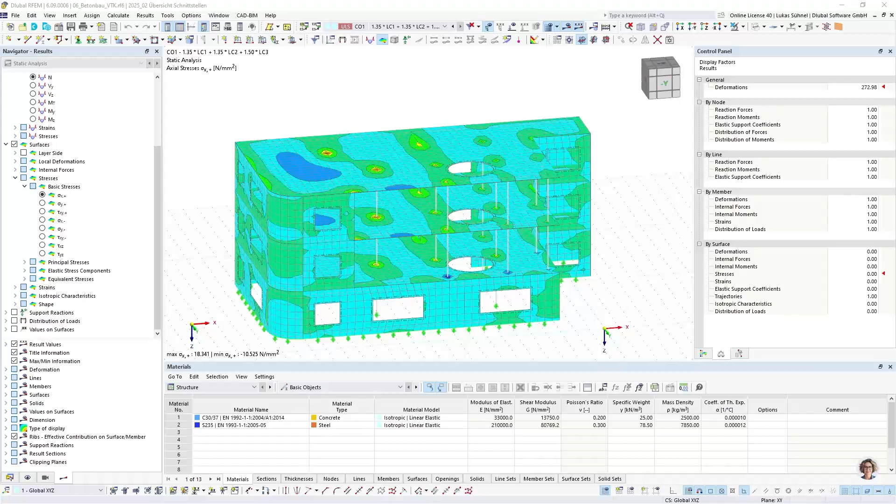And you can open the VTM file with the ParaView viewer. So let me show that as well. It's a freeware. You can download it. Just Google ParaView and download, and then you can open the results.vtm file. You can open a lot of files. It's quite a good viewer. Now I'm interested in that file.

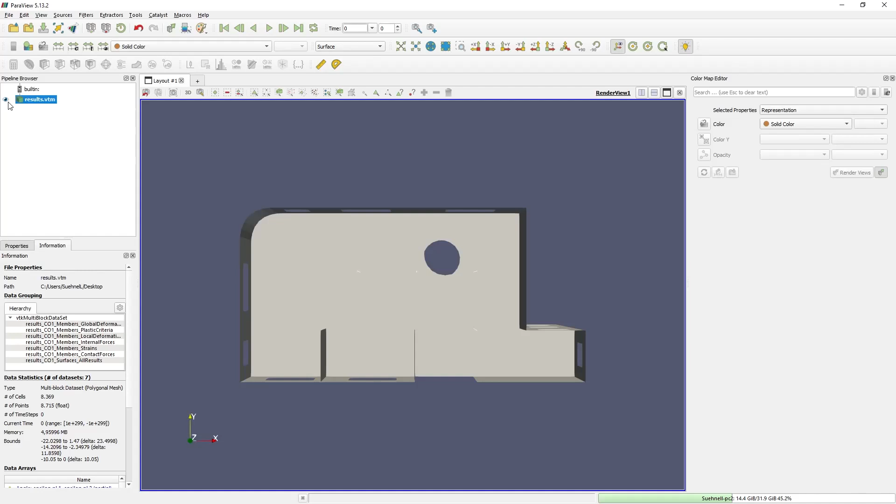Press OK. Then I activate my file, and you can rotate it. You see it's like a simplified representation of the surfaces and the beams, or the columns in that case. And the good feature here is that you can select the results that you want to see, and you get them in a graphical representation.

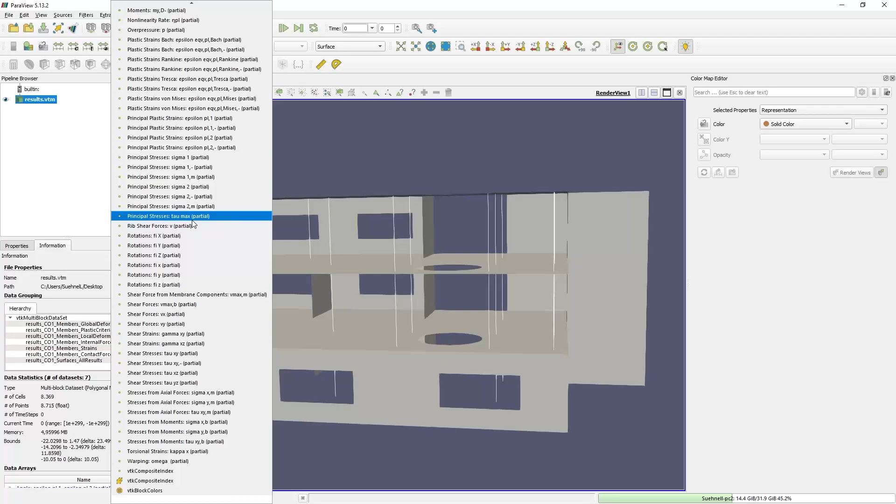So for example, interesting could be, where is it? Displacements, the global displacements. And then you get this rendering. You could change colors and so on. But in general, you can display these results here, and we can double check it with results in RFEM.

So let's display here the deformation as well. And you can see mostly in these areas we have the biggest deformations, and at the front border of these slabs, and the same results we can see here.

So what's the use case of that file format? I could imagine that in case you want to display the RFEM results in your own program for some reason, then you have, in my opinion, two options. You can use our API to read the results that you want to import into your own program, or you use this VTK file format to export the results into that result container, and then read it from that file into your program. That is the use case I can think of.

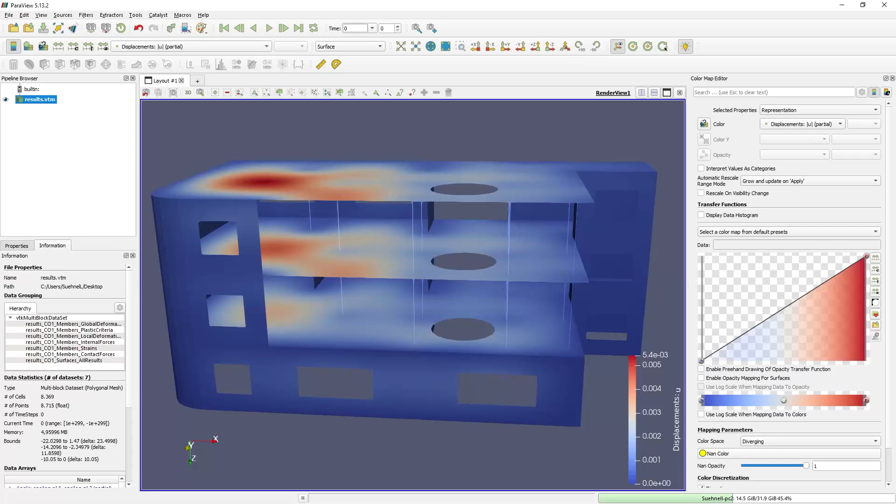Okay. And now concerning the last file format, the SVG file format. It is a format for the visualization of 2D graphics. So it's a simple 2D graphic that you get out of this export. It is a vector-based graphic. So the good feature here is that you can scale your graphic without having a loss of quality of the picture. I can also briefly show that.

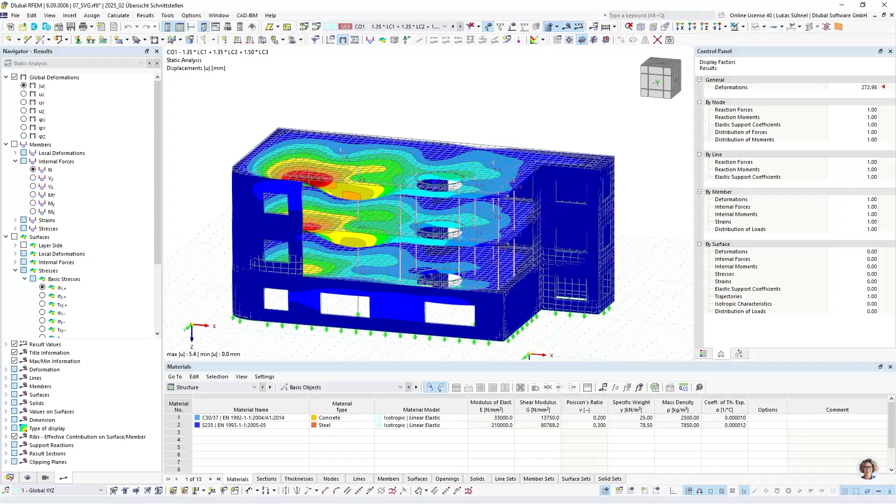So I will open another file again. For example, another concrete building. And inside that file, I have, for example, the rebars, the mesh reinforcement. Let's see. We can activate here the rebars. For example, it's for the members, but I think I also have some for the surfaces. Well, just partially. And let's say that is a graphic that you want to share.

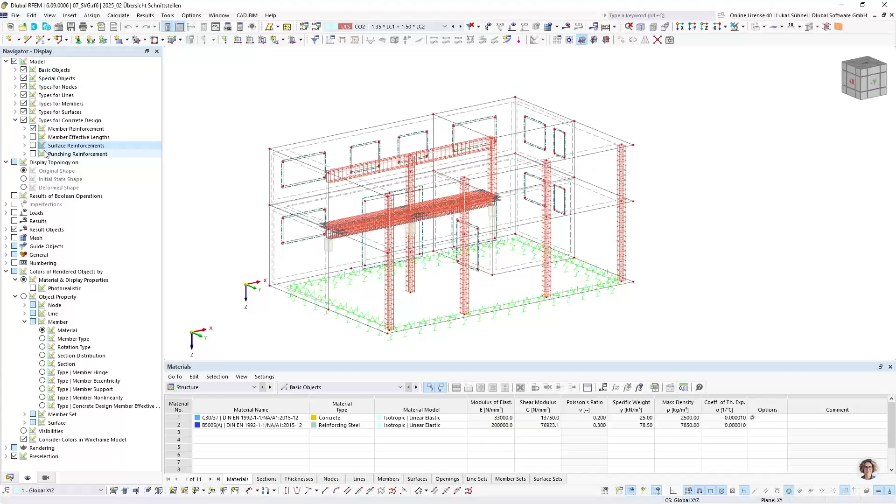Maybe you want to activate also additional information. For example, if we want to display the top and bottom reinforcements of these members or columns, or maybe even this information about the stirrups, 12 diameter 10 every 30 centimeters. So these are graphics you can create here in RFEM in the main window, and then you can export it into, for example, the SVG file format under File, Export, SVG, desktop. The name is okay.

And you can open these files with your browser basically. Just double click on the file, and of course it's on the other screen, doesn't matter. You can scale it, increase the size, and the quality remains really good. So that is the benefit of this file format. I personally don't have a real use case. Maybe if you have a nice graphic in RFEM that you want to scale for some reason for a presentation, it could be used. That's all I can think of.

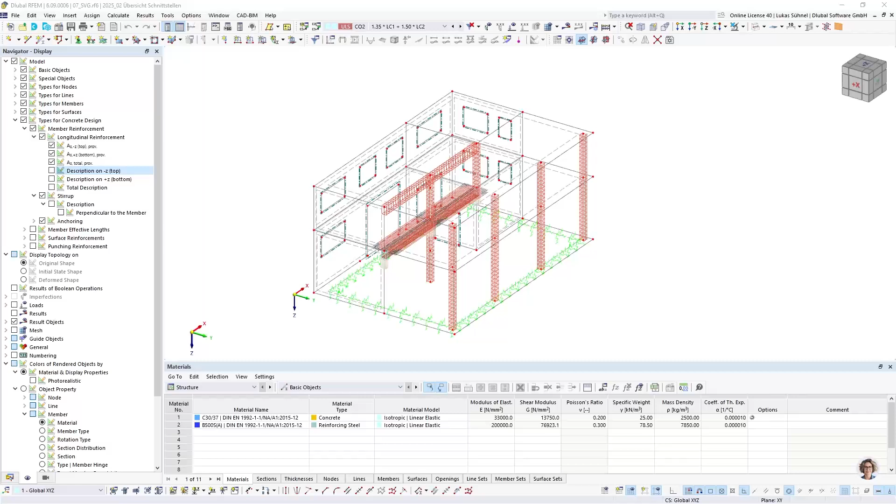All right, this was all the information that I wanted to share regarding our file formats. I hope you got a nice overview about them. Maybe you saw some workflows, or you got some information that helps with your workflow between the detailing and the structural analysis.